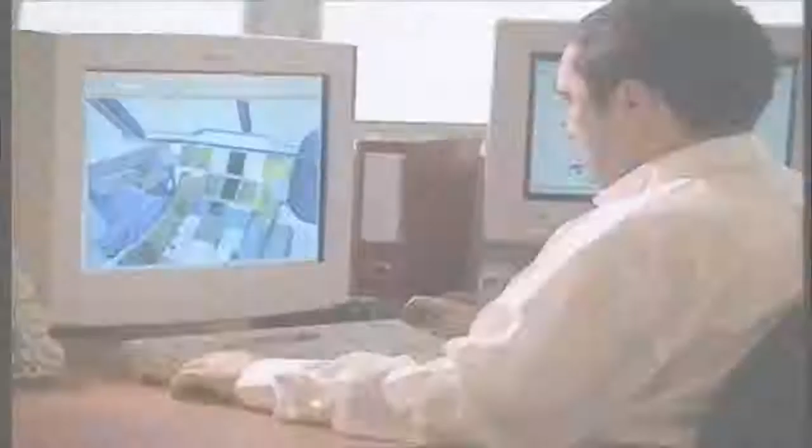It's a mega plane, bigger and heavier than any other passenger plane in the sky. It will hold more people than any commercial jet flying. Designers have spent billions. Now is the moment of truth. Will the world's biggest passenger airliner survive its maiden flight?

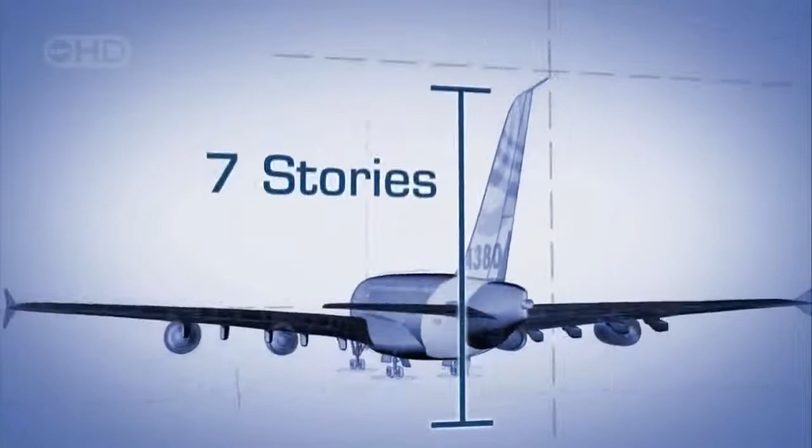An early spring morning, clear skies and a light breeze over southwestern France. Crowding the fields that flank Toulouse International Airport, 40,000 spectators, backpackers, campers and journalists from around the world, all vying for the perfect spot to watch the maiden flight of the Airbus A380, the largest passenger plane ever built. It's 73 meters long, 7 stories tall at the tail, almost 80 meters from wingtip to wingtip, heavier, longer and taller than a 747, with 2 full levels of seating, enough to hold over 550 passengers.

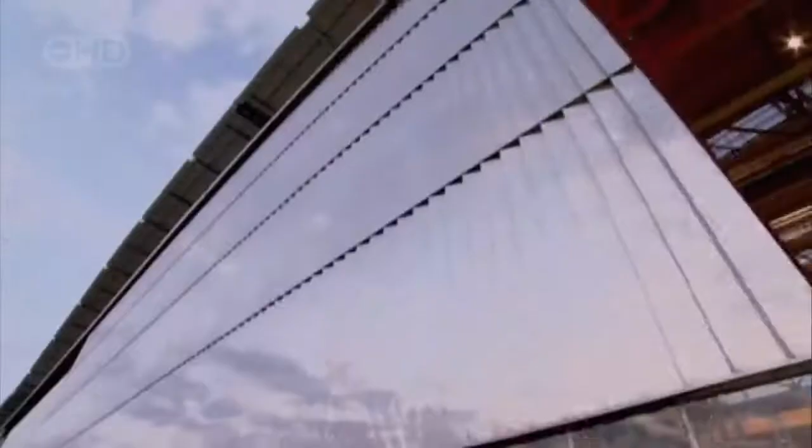Getting this monster off the drawing board required new, super lightweight materials, 4 powerful new mega-sized engines, massive new factories across Europe, and a computerized flight control system more sophisticated than any other in commercial aviation. This moment is the biggest gamble that the company has ever taken. A $12 billion investment, the company's entire future, and the lives of future passengers all ride on the success of this historic test flight.

Alongside the runway, a hush settles over the crowd as the megaplane comes into view. Gradually, it gathers speed, accelerating to reach its takeoff velocity of 269 kilometers per hour. Then, as it nears the end of the runway, the moment of truth. The massive nose tilts skyward. A sliver of daylight appears beneath the rear wheels, and the Airbus A380 takes to the sky for the very first time.

The engineers and technicians in the crowd breathe a collective sigh of relief. Their baby is flying.

The question now is, does anyone want a plane this big? Will the unprecedented size prove a boon or a boondoggle? Is this super jumbo the future of commercial aviation? Or the biggest white elephant since Howard Hughes built the Spruce Goose? It all depends on whether Airbus can convince airlines that travelers will want to trust their fates to this flying cruise ship.

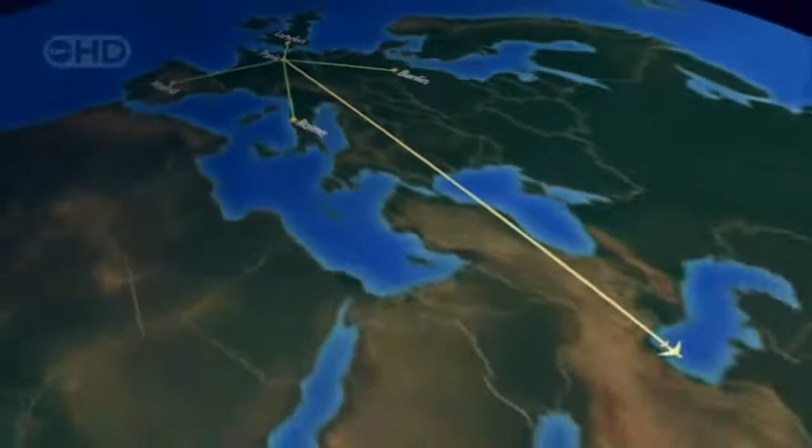The A380, though, is an altogether different order of beast. It's designed for hub-to-hub travel. Passengers will board a small plane near their home, then connect at a major airport to a larger plane, travel halfway around the world, and get off at their final destination. It's a strategy specifically designed to serve the most rapidly expanding long-haul routes in and out of Asia, and to cater to customers who appreciate a bit of pampering.

The plane's sheer size, with two passenger decks, is large enough for both standard seating as well as more luxurious features, like a lounge, a high-end shop, two staircases, even a waterfall. It's a breathtaking dream, but no one knew if such a plane could be built.

Some argued that such a craft would be far too heavy and expensive to be practical. But a tenacious and aptly named Airbus executive, Charles Champion, wouldn't take no for an answer. He encouraged his design team to think outside the box.

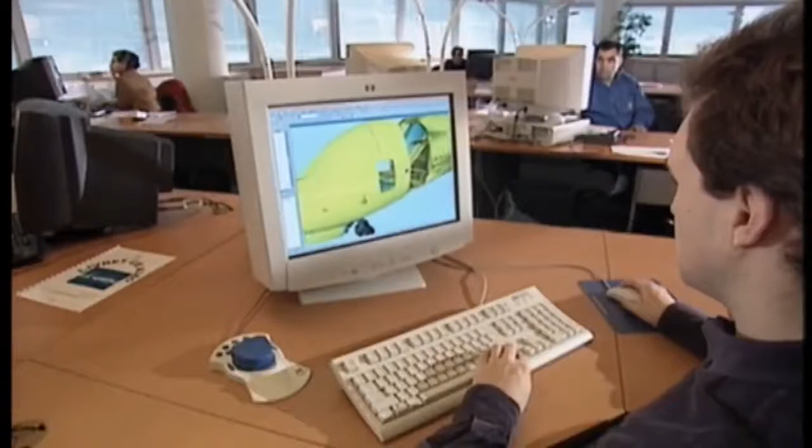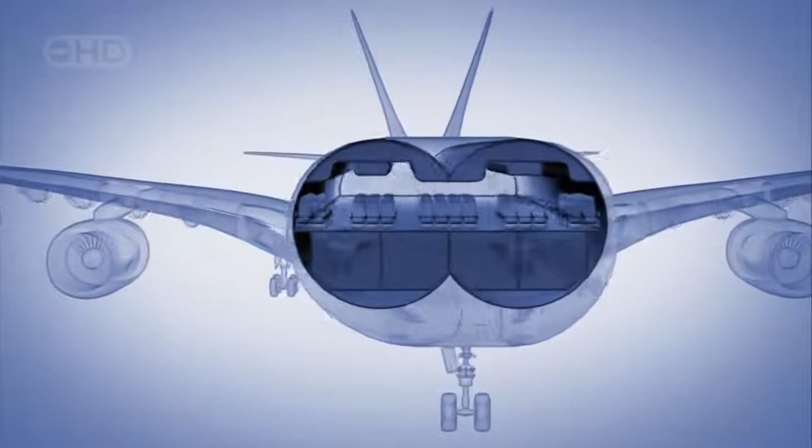Well, there were lots of weird designs. Some looked at the double bubble—one of their first ideas, a double-wide fuselage. It looked promising, but computer analysis showed that it would be far too heavy and not sufficiently aerodynamic.

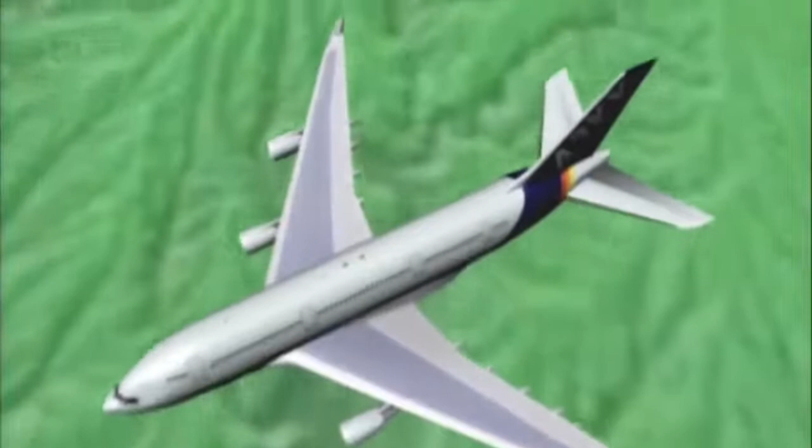So Champion sent his team back to the drawing board, and eventually they came up with this history-making concept: a full-length, double-decker passenger cabin, with a third deck below for cargo. Space-wise, it's the equivalent of two complete wide-body cabins, one on top of the other. The new plan called for an aircraft only 2.5 meters longer than Boeing's 747. It was 15 meters wider and 5 meters taller.

But when they ran the design figures through the computer, they had a shock. The plane was far too heavy. And we came up with horrid figures, saying, my God, this is the weight of the aircraft, it doesn't work.

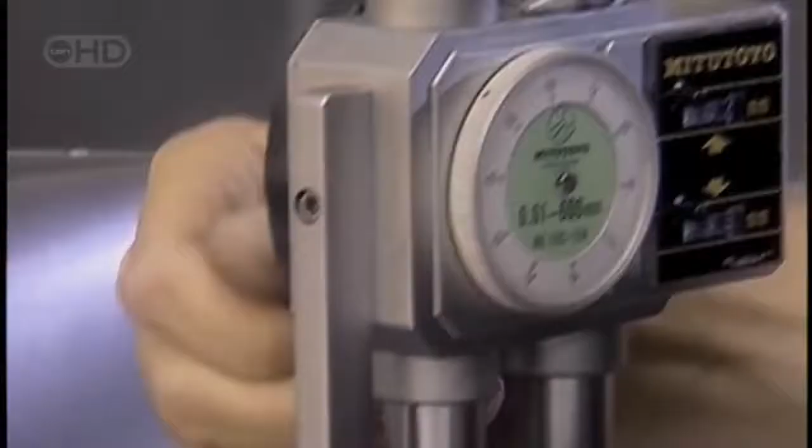So what we did immediately at the launch of the program, two to three months afterwards, we launched a very strong challenge on the weight. The team set out to bring the base weight of the aircraft below 277 tons—that's only about 50% heavier than the 747. An ambitious goal for a plane designed to carry over 100 more passengers and their luggage halfway around the world. Unless Champion and his engineers could find the means to beat that target, the dream would die.

Airbus engineers were faced with a design challenge that called for a lightweight plane carrying over 550 passengers at a lower cost per seat, not to mention quieter and less polluting than anything in the air. The design team knew they would have to rethink everything. They needed lighter materials, more powerful engines, larger wings, even bigger and smarter factories. Every component would have to be scaled up from supersize to mega size.

But even while the engineers were still scratching their heads over the details, the Airbus sales force was already hard at work, seducing customers with visions of the future. They created a full-sized interior mock-up that promised passengers in coach some relief from the grind of travel, with seats an inch wider than in other planes, and overhead bins 10% larger.

Each plane can also feature a new interior illumination scheme to eliminate the upsetting effect created when flight attendants suddenly switch on overhead lights. The kinder, gentler system in the A380 mimics the gradual transition from day to night and back to daytime again. These and other innovations make the plane distinctive, but it's the promise of opulent luxury that really turns heads. To help build excitement, computer programmers constructed a virtual showroom where airlines can bring to life their wildest design fantasies.

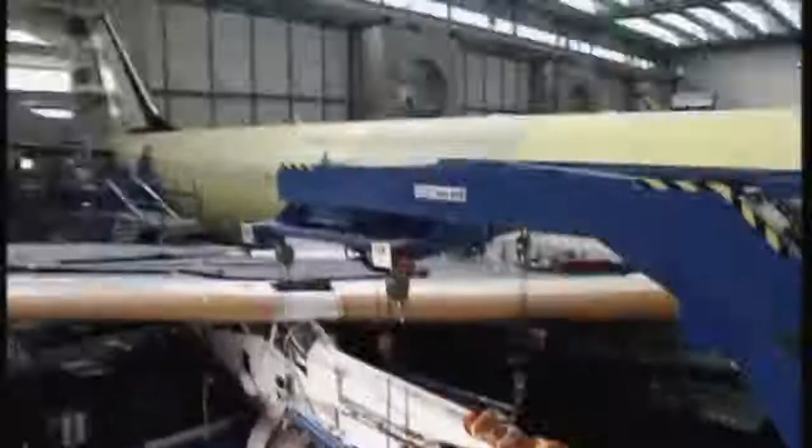Of course, no dream could take flight until engineers came up with a way to lift all that weight. In late 2000, builders finally settled on a design. For power, they would buy engines built by Rolls-Royce, capable of providing 30% more thrust than the engines used on the 747. Each massive power plant cost $15 million, as much as a ton of gold.

Altogether, they account for almost 25% of the cost of the entire plane. If there's one thing this aircraft needs, it's thrust that won't quit. Each engine provides up to 80,000 pounds of force. Running at top speed, this mega guzzler sucks down a litre of gasoline every second.

The A380 is designed for routine flights lasting 13 hours or more. That means when it's fully tanked for takeoff, the A380 carries a lot of fuel: 260,000 litres, 20% more than the load carried by the 747.

Just imagine what would happen if anything threatened the integrity of one of those fuel tanks, like a catastrophic engine failure that sends shards of metal tearing through them. That's the nightmare that haunts engineers at Rolls-Royce, and they're about to destroy an engine to make sure it never occurs.

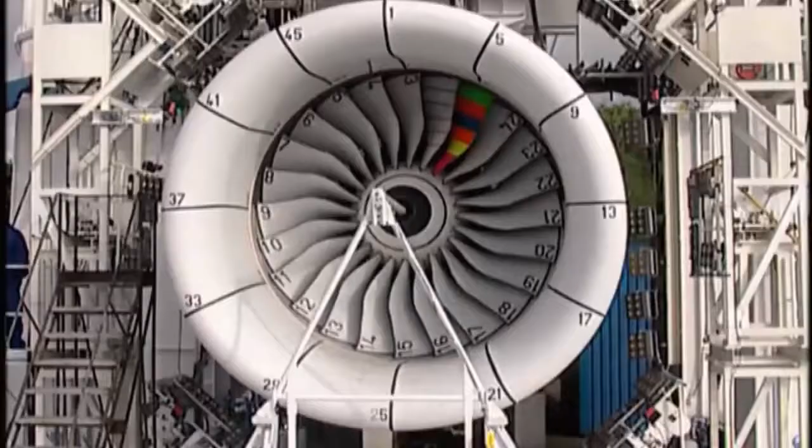These 24 titanium fan blades suck air into the maw of this A380 engine. Each blade is 1 meter in length and weighs 15 kilograms. Lightweight, but super strong.

When the engine is roaring along at full throttle, the blades spin at almost 3,000 revolutions per minute. The centrifugal force at the tip of each blade is equivalent to the weight of a 110-ton locomotive. If one of these were to break off and escape into the engine, it could wreak unimaginable destruction to the plane.

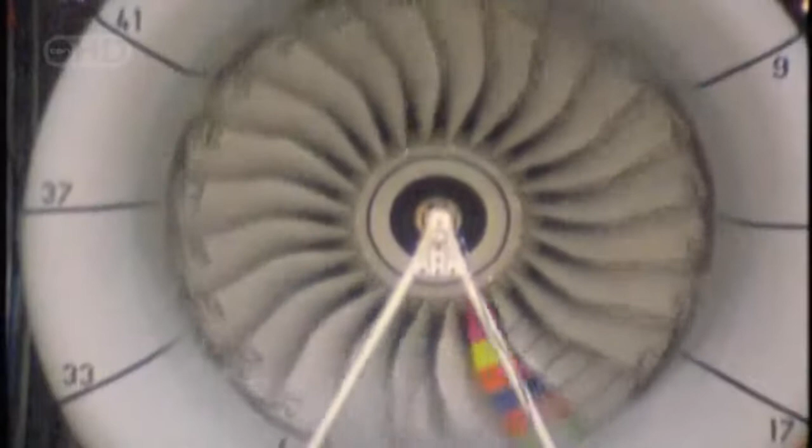That's why Rolls-Royce engineers are about to conduct an engine failure test. They're going to intentionally cause one of the fan blades to break off at full speed in order to prove that the engine enclosure can contain the damage without letting any metallic fragments escape. In the process, they will totally trash this $15 million engineering marvel, a small price to pay when the lives of over 550 people could be at stake.

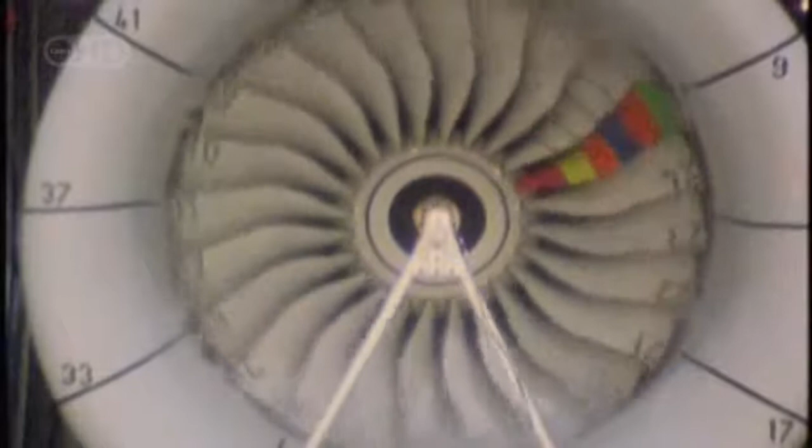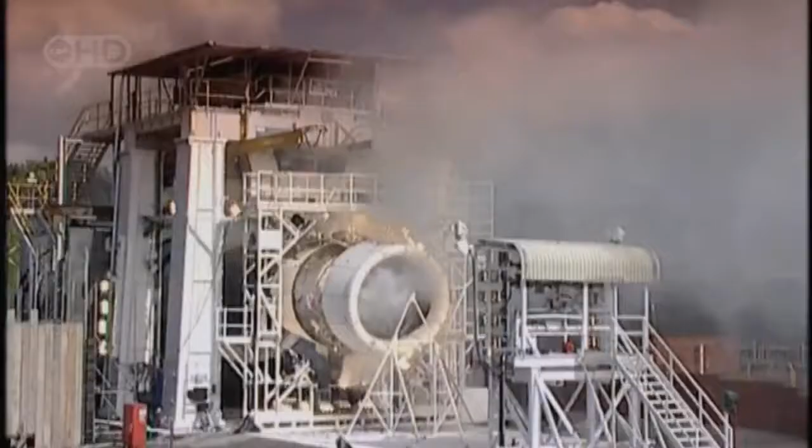A super slow-motion camera captures every moment in excruciating detail. The blades are striped to make visual measurement easier. When the fan is spinning at full speed, engineers send a signal to explosive bolts at the base of the multicolored test blade. Faster than even this camera can see, the knife-like piece of metal shears off and flies into the engine mechanism, wreaking havoc, but no fragments escape.

The A380 engines are safe for flight, but there are many more pieces to the puzzle. Every other major component would have to be designed from the ground up.

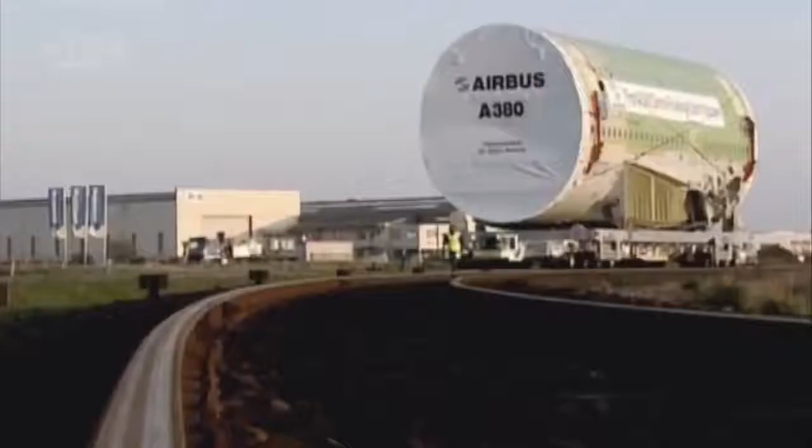Luckily, Airbus has already turned the world into a giant mega factory, with 1,500 suppliers and facilities used to build its existing planes, scattered over 30 countries, yet tightly linked by an advanced communication and transportation network.

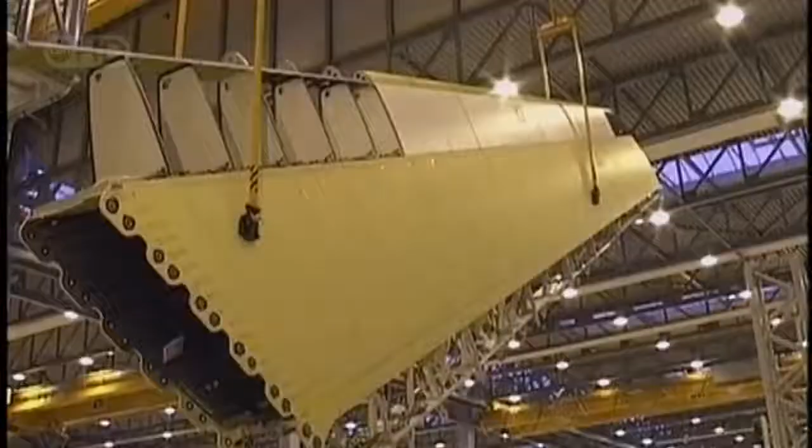To assemble the hundreds of A380s the company hopes to sell in the coming decades, planners settled on 5 countries to build the major components: wings in Wales, engines in England, the fuselage and vertical tail section in Germany, the horizontal tail section in Spain, and of course France, where all the pieces came together to assemble the finished plane.

The process begins in Wales, in 2 huge new wing factories, built to assemble the largest and most structurally complex commercial airplane wings ever designed, using 32,000 components shipped in from every continent except Antarctica.

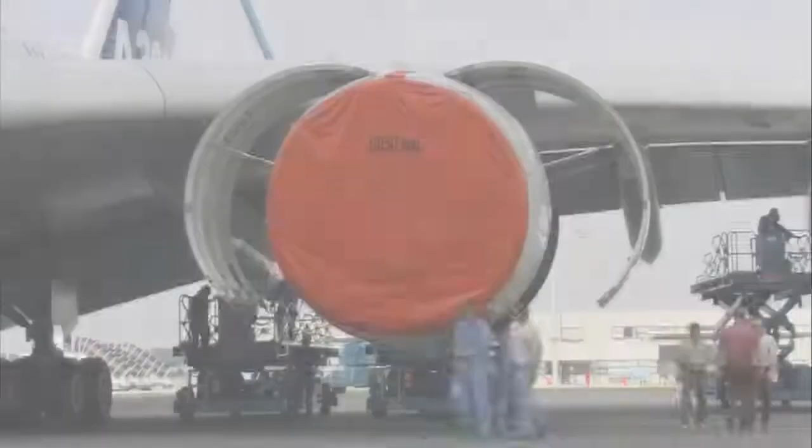The wings on the A380 are true mechanical marvels. They provide flight control and enough lift to carry the fuselage, plus the 4 supercharged engines, each weighing nearly 6.5 tons. And with 260,000 liters of fuel loaded inside 10 interior locations, the wings are also flying fuel tanks. They're one of the most critical structural components in the entire aircraft.

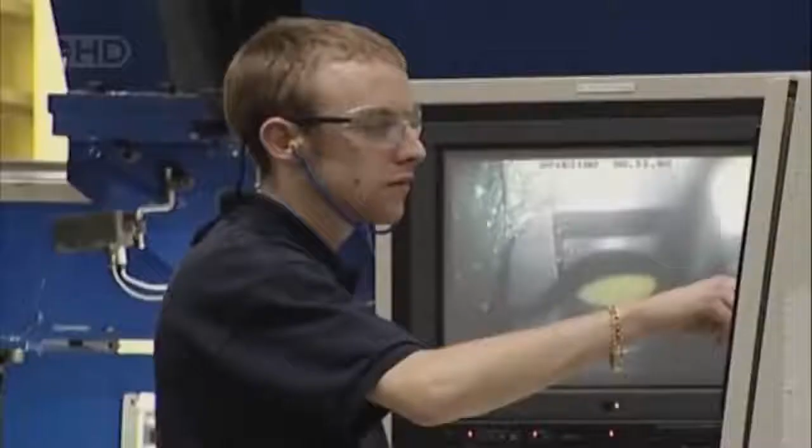The precision construction process begins with sheets of aluminium, destined to be shaped into the 10 panels that cover each wing. Each piece has its own shape and weight requirements. To whip one up, just follow 3 not-so-easy steps: shave it, wrap it, then bake it.

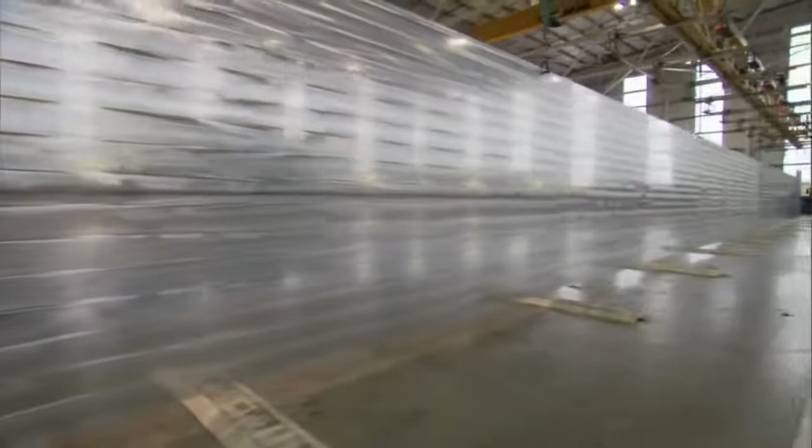This 34-meter-long slab of aluminium weighs in at 5 tons, way too heavy for the wing panel it's destined to become. In its final form, it will weigh close to 1 ton. So off it goes, to get the aerospace version of a tummy tuck. Overhead cranes use 32 powerful suction nozzles to lift and transport each aluminium slab.

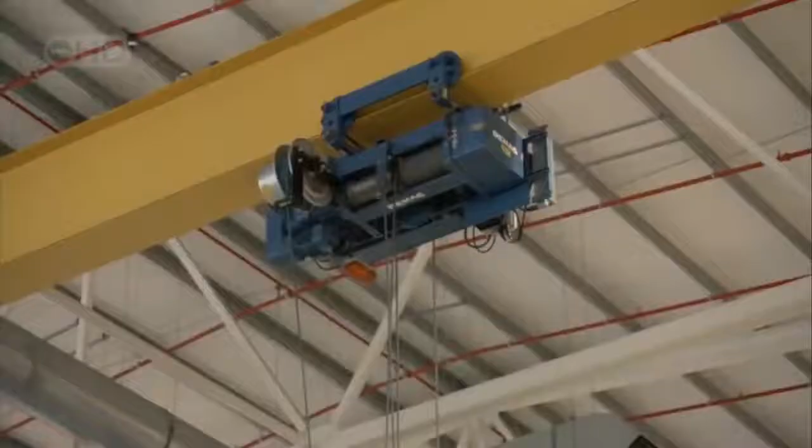Tim Fernifer carries the burden of responsibility. Using a remote-controlled steering device, Tim guides the 5-ton piece of metal across the factory floor, but he can't do it alone. His team must watch the motion of the wing panel throughout the ride.

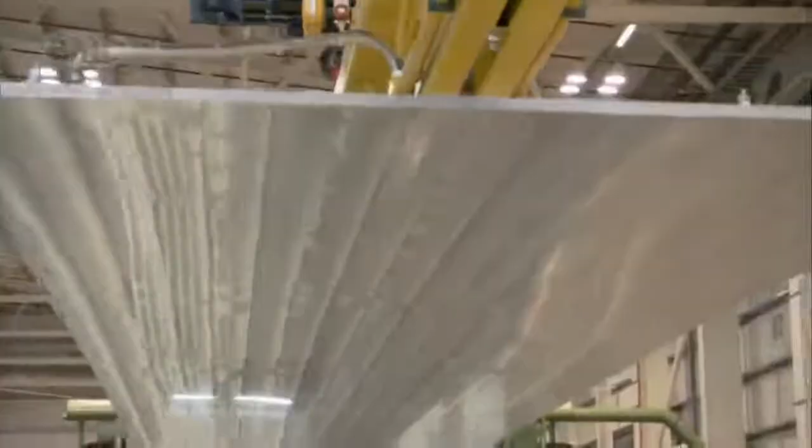You've got to be particularly careful when I'm handling it. I can't see down the other end, so I need another pair of eyes down there. It's just health and safety issues. You have to watch, make sure everybody's out of the way when it's actually moving. It's a dicey ride across the factory floor before the huge sheet can settle safely into position.

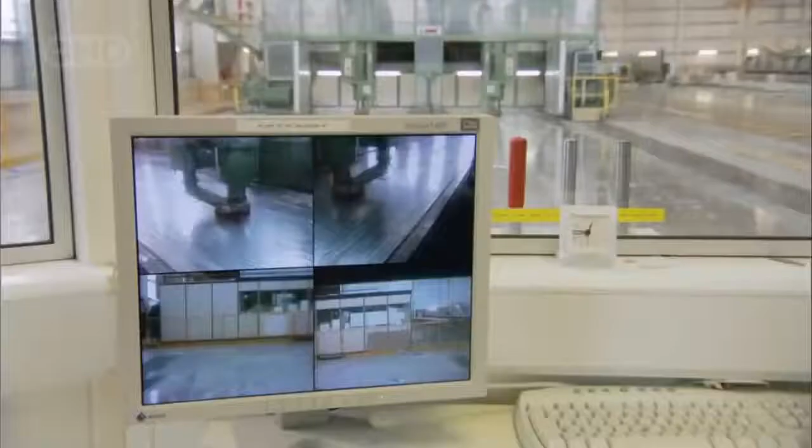A milling machine 40 meters long. Like an oversized cheese grater, the precision cutting head slowly cuts back and forth across the surface of the wing, painstakingly shaving the aluminium until the panel shape matches the 3D contour map stored in the machine's computer. The process takes up to 3 days. It eliminates 75% of the panel's weight while maintaining its strength.

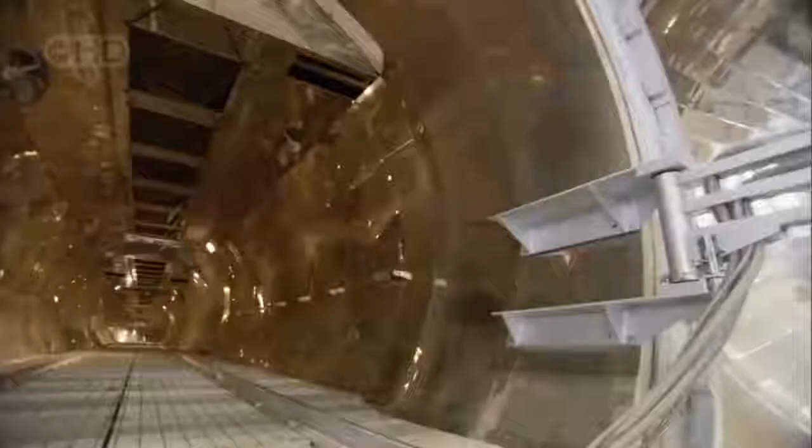Then it's ready for the oven, one of the world's largest pressurized heat chambers, 42 meters long, almost 6 meters wide. Technician John Massey has cooked plenty of wings for smaller Airbus planes, like the A320. It's a challenge to see it go from the size of the 320 to the size of the 380. It's a huge, huge jump.

The A380 wings are 50% larger than A320 wings. That means a 50% greater chance of error in this critical process. Baking requires careful setup.

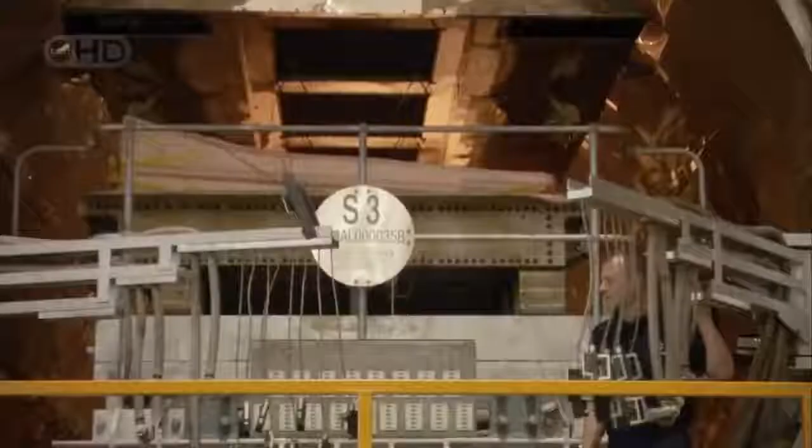First, Massey and others place the segment in a special metallic form. Then they vacuum seal the entire assembly with a massive piece of plastic shrink wrap to protect the metal from contamination. Inside, the heat must be uniform across the entire panel, 150 degrees centigrade, with no room for error.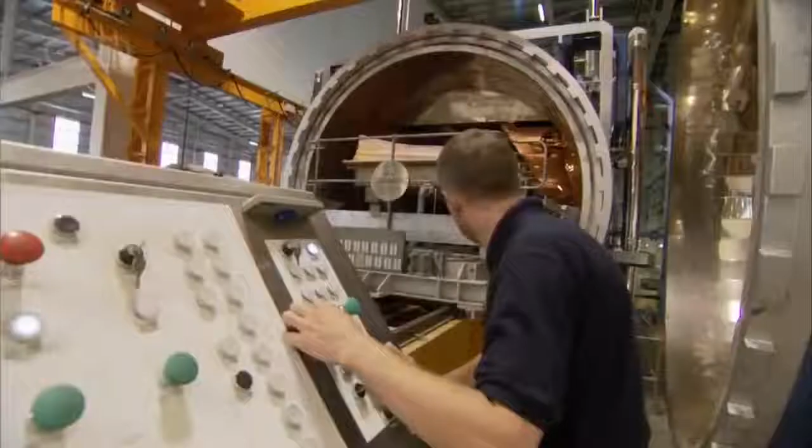We try to avoid any changes in the vacuum or the temperature, so the temperature must remain constant right throughout the process. It must maintain within 3 degrees. Otherwise the run is invalidated. After 24 hours, the panel is ready.

Specially equipped vehicles rise up and move into place in front of the oven. All eyes are on the plastic protecting the wing panel. If it breaks, the aluminium wing piece is compromised. A disaster. The entire wing panel would be worthless.

If the bag bursts, it means starting the job again from scratch. Anxiously, they scan the surface for any breach. At last, the wing is cool enough to touch. And good news, the bag appears to be intact.

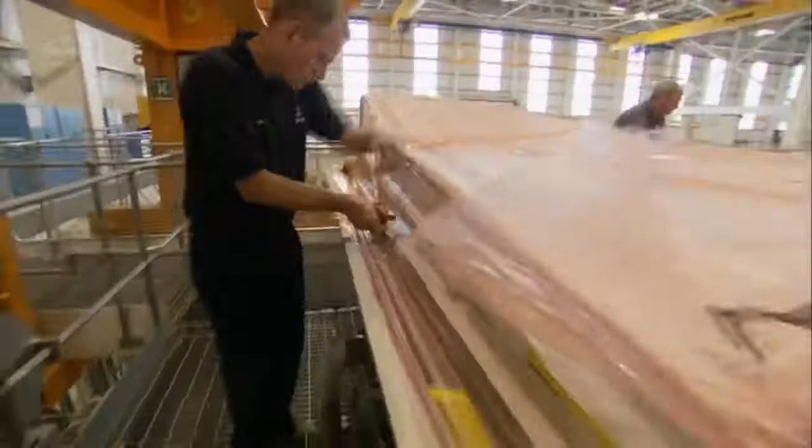Finally, the wing segment arrives in its docking bay. Here, the technicians first remove the plastic and cloth wrap. Now begins the tedious search for flaws.

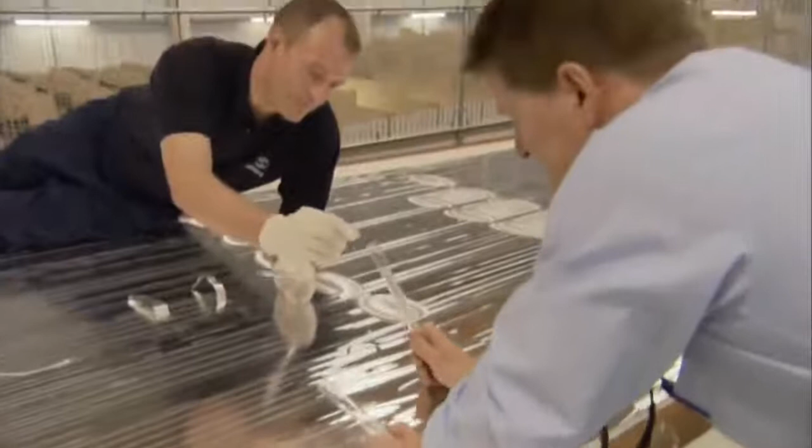John's boss, Gareth Williams, arrives to inspect the piece. He retrieves small metal rods that were baked onto the top of the wing panel. Each of these cylinders tells an important story about future safety. These are test pieces which are made of the same material as the wing panel, and we use them to confirm that the heat process this part's just gone through is correct and to the right specification.

When this testing phase is complete, Gareth and John get the okay to move the wing to its next destination.

The nearby wing assembly plant, an enormous brand new factory located just up the road. It's one of Britain's largest industrial buildings built in this century. It's nearly 85,000 square meters in area, equal to 12 full-size football pitches. This is where the builders attach the aluminium skin panels to the wing skeleton.

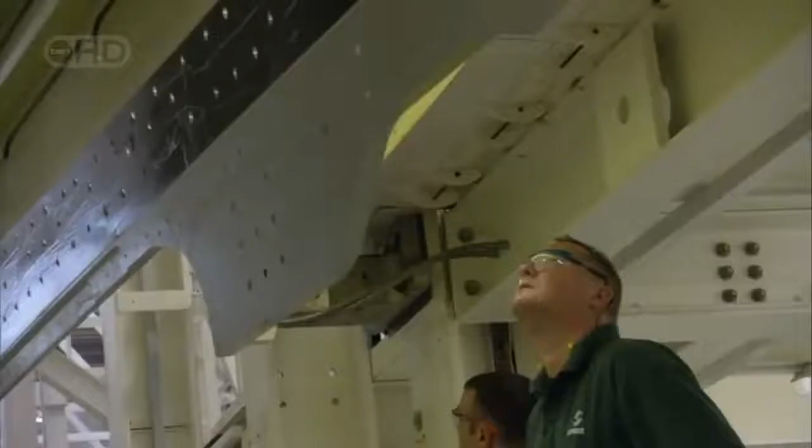George Lee guides his team through the tricky assembly process. Today they're preparing to lift and place one of the largest of the 20 aluminium panels, 34 meters long and weighing in at more than 1 ton.

Size is a great challenge because everything requires some form of overhead lifting. Nothing can be lifted manually, so virtually everything requires overhead craneage movement, and therefore the management of the craneage system is very, very important. The panel hangs like a huge guillotine, suspended over the factory floor.

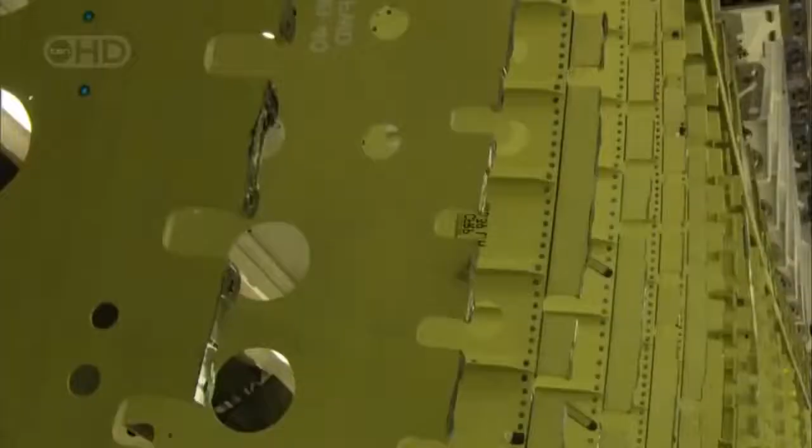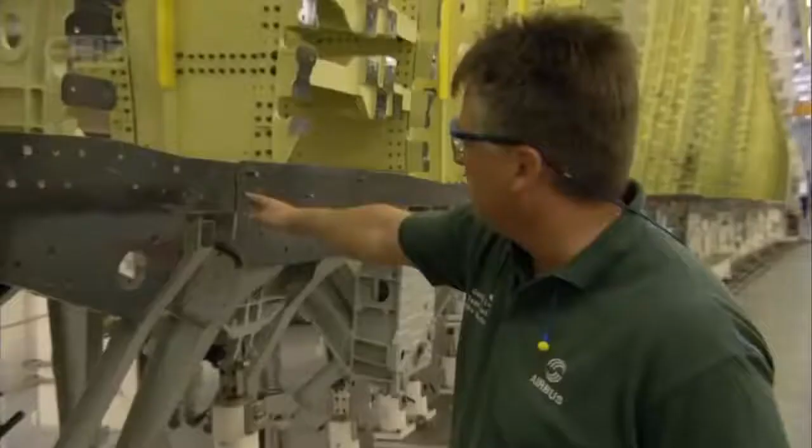But that's not all that's hanging over the assembly team's head. Time is running out. Along the edges of the partially constructed wing, builders have applied a sealant that'll help ensure the integrity of the fuel tanks. The sealant dries quickly within hours. The team must fit the wing panel into place before the sealant dries, or the wing could be defective.

This time they're cutting it close. The only concern I've got is the time factor. If they don't succeed, the team will have to scour the sealant off the aluminium surface and start the whole process again.

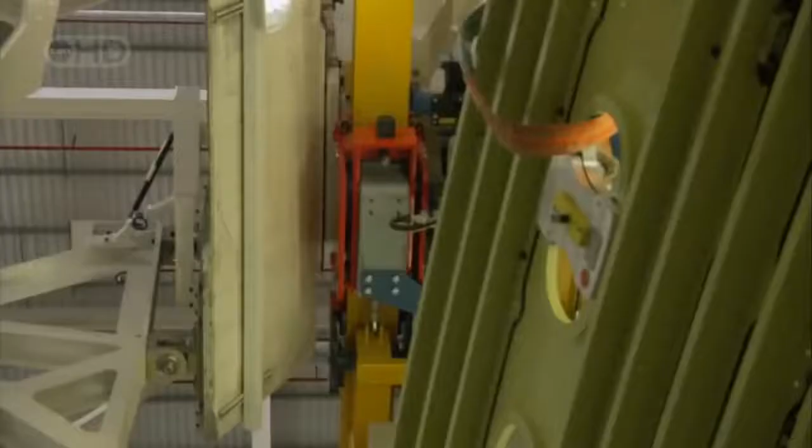Finally, the panel settles into place. 1 down, 9 to go.

It can be stressful, yeah, it can be stressful. At certain times, it's an enjoyable job, because when it actually all works and goes together, it's quite enjoyable. You've made it an achievement.

Now it's time to glue and bolt together the pieces, like building the world's biggest model airplane wing.

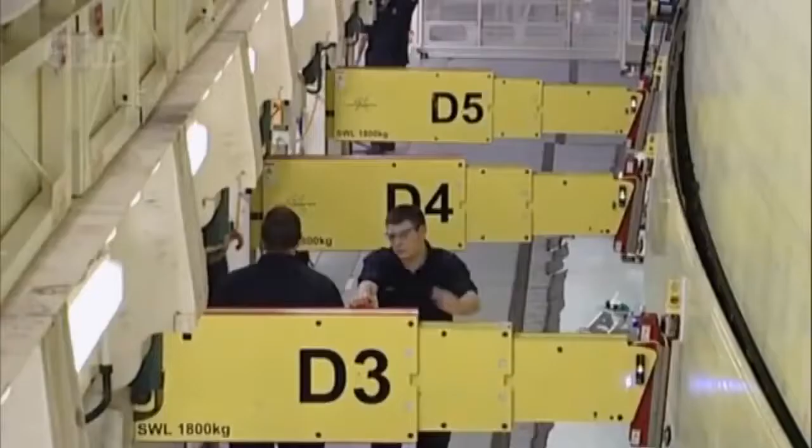This part of the process remains a carefully guarded trade secret. The company wants our cameras off. No cameras.

The secret assembly process inside the jig will take nearly 4 weeks to complete, but it takes more than a wing to make a plane.

All across Europe, more factories are coming online, pumping out body parts of this giant Franken plane. But not everyone is happy to see this kind of progress. Some locals in Germany are up in arms over Airbus's ambitious plans.

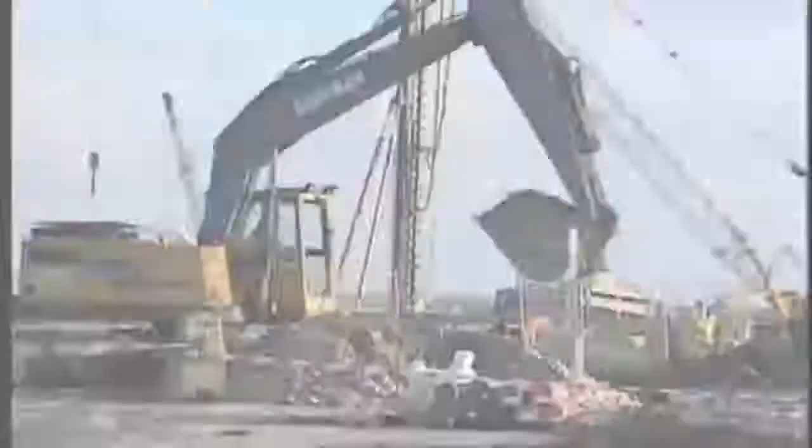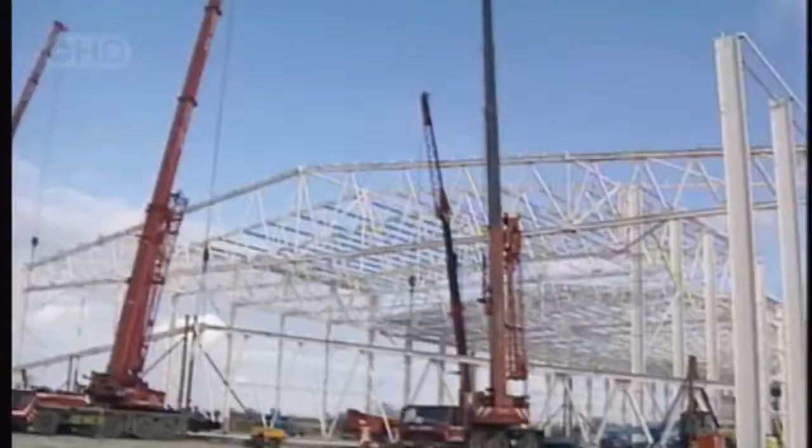This is the newest Airbus factory in Hamburg, a megastructure big enough to house 4 A380s side by side. Airbus has been building airplane fuselages in Germany for more than 30 years. But with the announcement of the A380, the company needed to massively expand the site and send finished planes here to get tricked out on the inside and painted on the outside.

No matter what the customer wants their plane to be, a 550-seat cattle car, a high-class hotel in the sky, or even a heavy-duty freighter, this is where the seats, the carpets, the stairs, and yes, even the bar and the waterfall will all be installed.

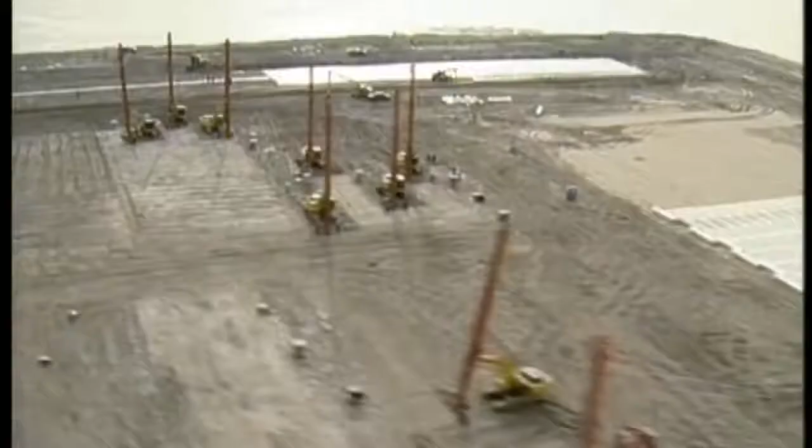The expansion plan called for 3 new buildings and a longer runway to accommodate the massive plane, but there was a problem. Airbus's main factory here sits alongside Germany's Elbe River, smack in the middle of Europe's largest tidal wetlands.

It's a very special area because we have there the influence of water from the country and tidal water from the sea. So we have a mixture of sweet water and salt water. This fragile ecosystem is home to 70 species of migratory birds. Now 71 if you count the Airbus A380.

Airbus wanted to fill in 140 hectares of pristine wetland, and local activists cried foul. A pitched battle in the courts and demonstrations in the streets delayed construction of the factories for over 2 years. But eventually, local and national politicians who wanted to bring business to the community intervened.

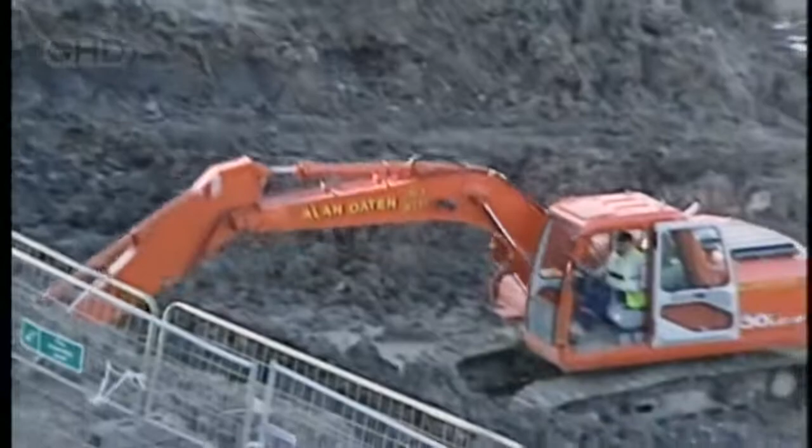The factories went up. One got busy building fuselage segments, but the other 2 stand nearly empty. More lawsuits still block the Hamburg facility from taking delivery of all of the planes it's meant to finish. Unless the company wins in court, it may have spent a few $100 million building a factory of little use.

The problem lies with the runway. Airbus needs a longer runway to accommodate a heavy-duty cargo version of the A380. We need the runway extension in Hamburg for the pilot to test the performance of the aircraft. And he only can test this when he has an aircraft with a weight which is approximately the weight you normally have in cruise altitude and a normal scheduled flight.

That plan to lengthen Hamburg's existing runway has met with considerable resistance from locals. Their concern: extending the runway will bring the tarmac to within just 450 meters of village orchards, and uncomfortably close to a Lutheran church that houses a priceless organ built in 1688.

A delicate instrument that could be damaged by ground vibrations and wake vortices, turbulent bands of air similar to miniature tornadoes. We have very precise information on the generation of these wake vortices, small tornadoes, wind generated by every aircraft, which can affect buildings and also persons close to the runway or close to the flight path. And we have predictions that we should expect occasionally winds up to Beaufort 12, which is about 130 kilometers per hour in the core, and these tornadoes will hit the church tower and the roof construction.

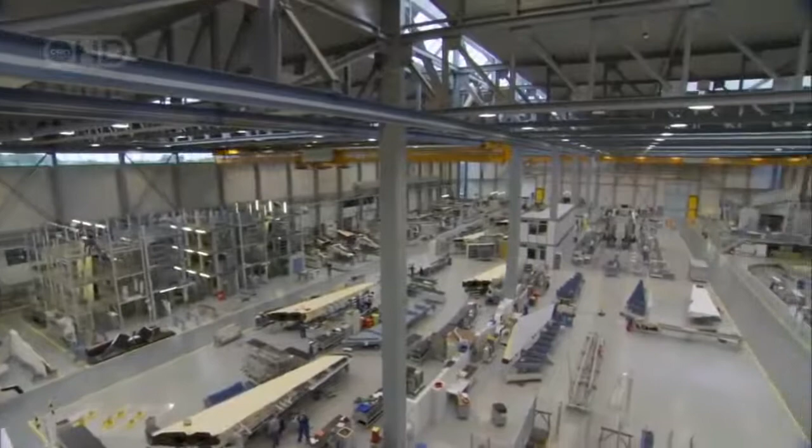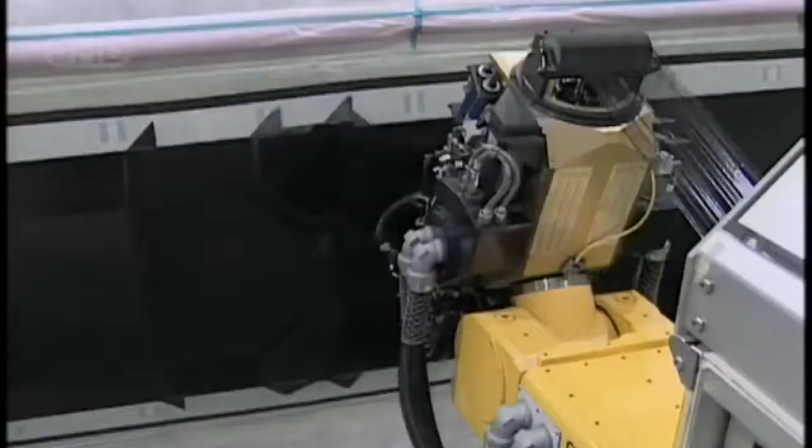But just 57 kilometers away in the town of Stade, another big gamble is underway. The company is using a futuristic material to build the largest commercial aviation tail fin in the world. It's called carbon fiber reinforced plastic, made out of the same stuff that gives diamonds their incredible strength. Carbon fiber is 6 times stiffer than steel and much lighter. It's the only option if builders are going to keep the weight of the plane below the target of 277 tons.

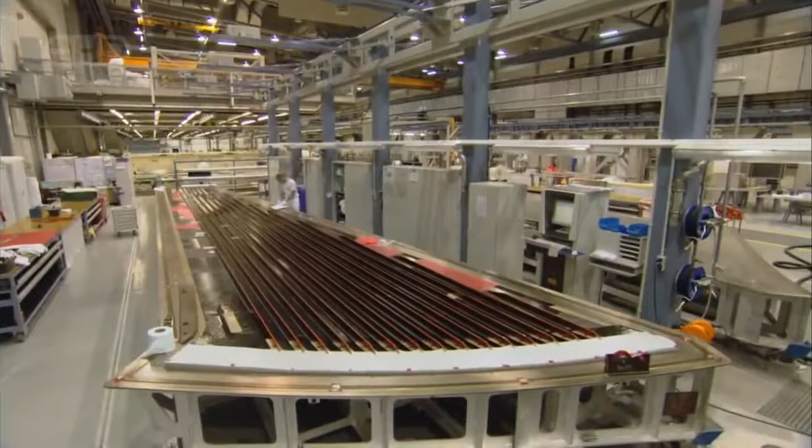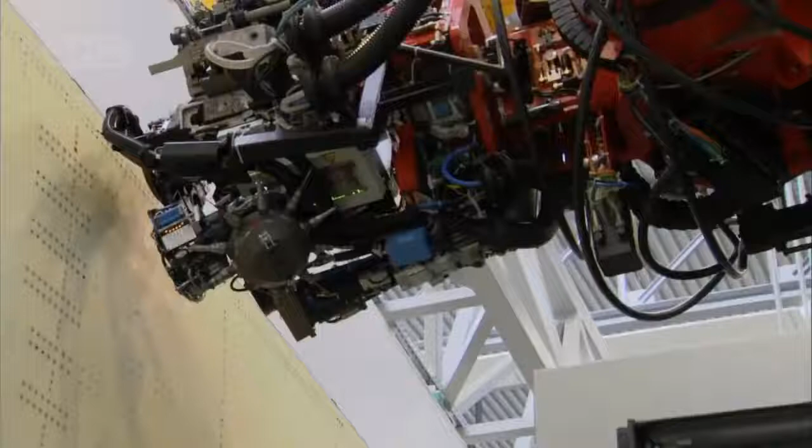Unlike forged metal, carbon-reinforced plastic parts are actually woven, like cloth. Fabricating machines spin out tail panels by combining super-strong carbon fibers with plastic resin to create almost any shape designers can imagine. After baking, strengthening, painting and drying, technicians join the lightweight panels to the tail skeleton with the help of this computer-controlled riveting robot. Working around the clock for a week, the robot makes 10,000 critical connections with tolerances no human can match. The integrity of the tail fin is crucial to the safety of passengers.

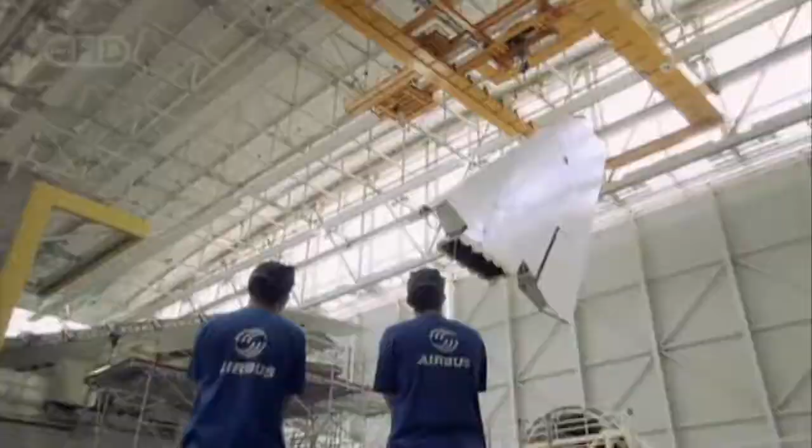It was the second deadliest crash in US history, and investigators made a disturbing discovery. It had been caused when the tail fin and rudder, made partly out of composite materials, sheared off as the plane accelerated. Investigators concluded that cockpit errors, not a failure of the carbon composite material, most likely caused the crash. Builders have applied the lessons of that catastrophe to the tail fin of the A380.

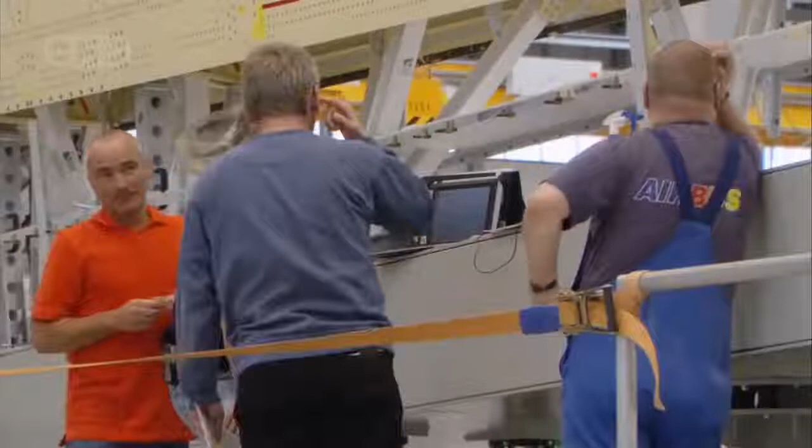But today, something's gone wrong on the factory floor. A lightning strike zapped the power supply, and now the precision riveting robot is dead in the water. We had a storm, a lightning strike. The PC failed and the hard disk was completely gone. Mother Nature has thrown a wrench into the works, causing a total crash of the system. It is electricity. Sometimes it happens. Normally we are protected, but it can just happen.

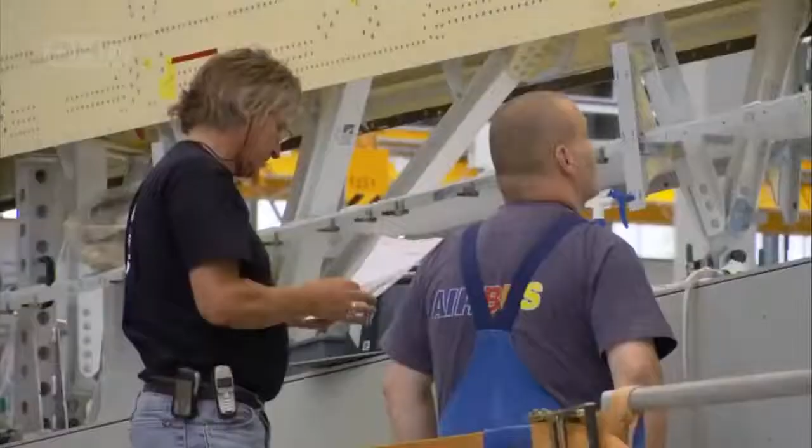Critical hours pass as Kai Baumgartner and his colleagues struggle to get the robot back online. If they can't fix the computer, they can't make the deadline set for finishing this tail fin. Kai and his team must find the problem, and quickly. By the end of the shift, the sound of riveting echoes through the factory once again.

Kai is finally back at work, personally verifying that every one of the 10,000 connections is perfect. A tiny camera positioned on the end of the riveting machine allows Kai to carefully examine each rivet, making sure to catch any abnormalities in the process.

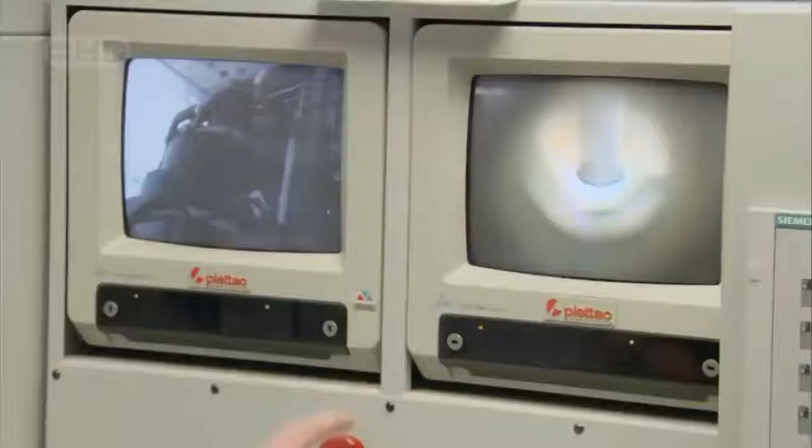I make sure that the drill doesn't get stuck or any mistakes happen. I have my different systems here. It can happen that something is stuck or that an error occurs. It's a repetitive process, but Kai must remain vigilant to safeguard the lives of future passengers.

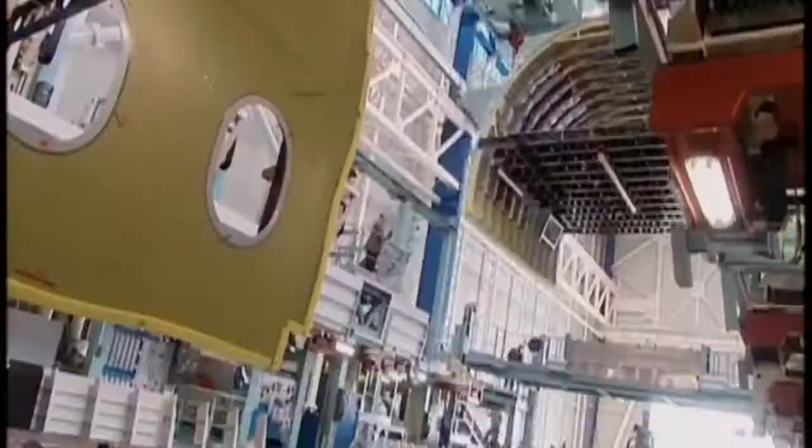Around the world, manufacturers and suppliers are putting the finishing touches on the components of the A380. But putting all the pieces together will be a logistical nightmare. Airbus's existing transport system, the custom-built mega freighter called the Beluga, is too small to haul the A380 components to the assembly factory in Toulouse, France. So builders came up with a risky plan to haul millions of dollars of critical components by water and land.

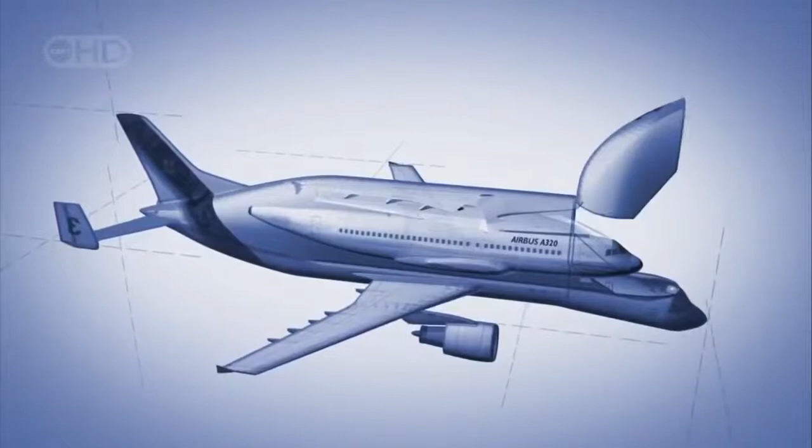Airbus had a problem. They needed to move pieces for the largest passenger plane in the world from factories all over Europe to their final assembly plant in Toulouse, France. For smaller planes, they could use the Beluga, Airbus's distinctive custom-built transport plane. The Beluga's cargo hold measures 7 meters high, 7 meters wide, and 38 meters long, big enough to swallow the fuselage, wings, and tail sections of Airbus passenger planes like the 150-seat A320.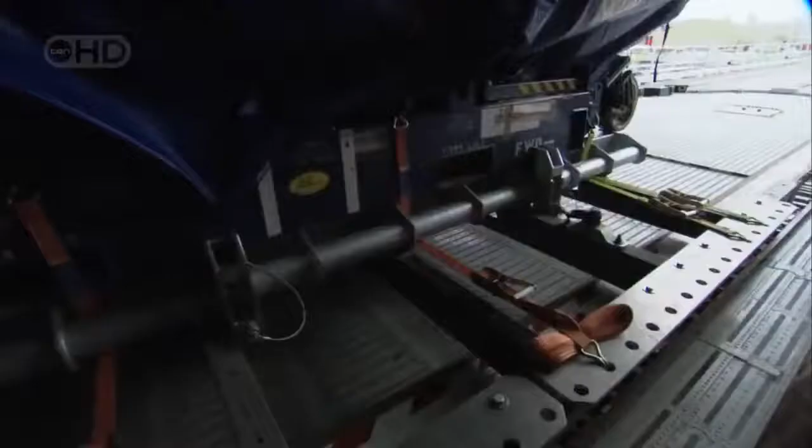But when Airbus decided to build the massive A380, the sheer size of the parts overwhelmed even the Beluga. The Beluga is far too small to carry the A380's enormous double-decker fuselage or its record-breaking wings. So to get their parts to the assembly plants, the company now had to move them by sea and over land, instead of a 2-hour ride in the belly of the Beluga.

Parts for the A380 joined a days-long parade of specially outfitted ocean ships, river barges, and trucks. Keeping this massive system on schedule is the job of Surface Transport Coordinator Philippe Nedelec, who has to keep it all moving fast. I like to say that I am a kind of conductor. I have to impose the tempo to everybody.

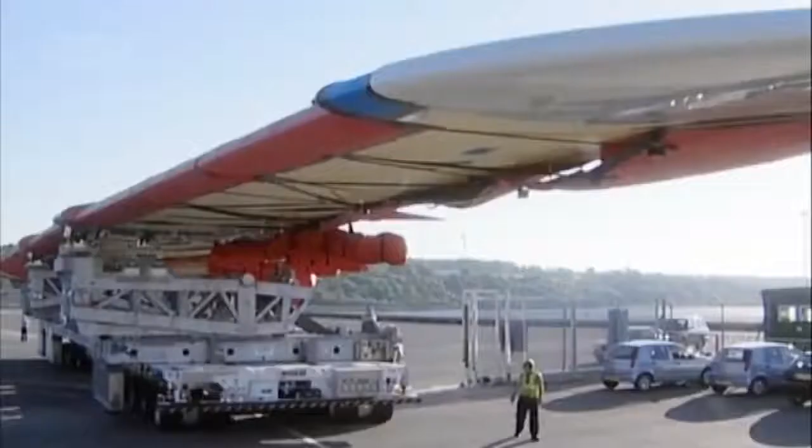Wings and fuselage arrive by sea in the port city of Pauillac in Bordeaux. From there, it's 96 kilometers by barge down the Garonne River. It's a tricky bit of navigation to clear the historic Pont de Pierre Bridge, a prized landmark built by Napoleon almost 200 years ago. We have to cross a very old bridge. And at the beginning, the Bordeaux people were very afraid of what these Airbus people were going to do with our nice bridge.

To maneuver beneath the Pont de Pierre, Philippe and his team keep careful track of the tides and the weather. If they don't time their trip just right, if the water is too high or the currents too strong, they could collide with the bridge, destroying precious cargo and damaging a priceless piece of history as well.

But waiting for the perfect moment isn't always an option. Suppose we miss a call for weather condition or some other things, then the boat can miss a tide, so we can miss 6 hours. And this 6 hours you can miss 1 week because we cannot start the road convoy every day. It's not so easy. We cannot start when you want.

Every pass under the bridge is a potential disaster. This time, they make it through, but just barely.

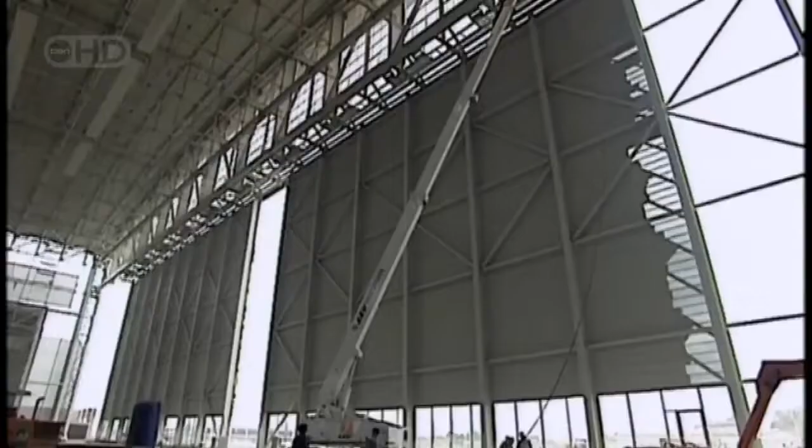At last, the convoy arrives at its destination, the final assembly line, the nerve center of the entire operation. The final assembly line sits on the edge of Toulouse's Blagnac Airport. As with all A380 factories, this one is huge: 500 meters long by 250 meters wide and 15 stories tall, using 32,000 tons of steel, enough to build 3 Eiffel Towers.

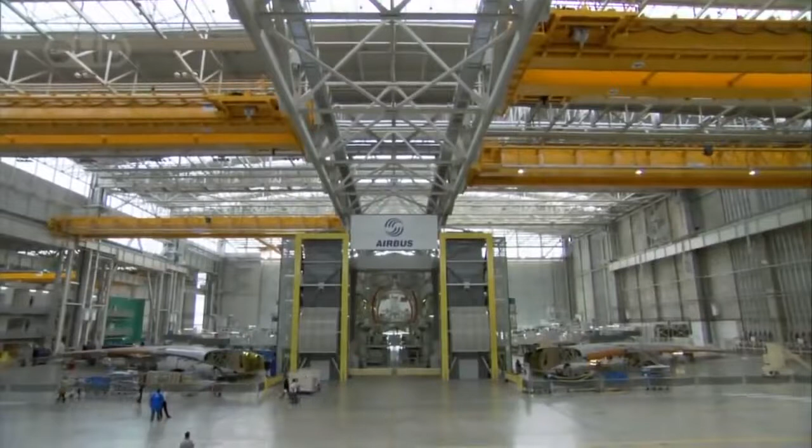It's in here that the massive plane finally begins to take shape, with the help of a gargantuan assembly structure known as a jig. According to Julien Pouillou, there's nothing else like it in the world. We're standing in front of the biggest jig that is used in the world to assemble an aircraft. This is the Station 40.

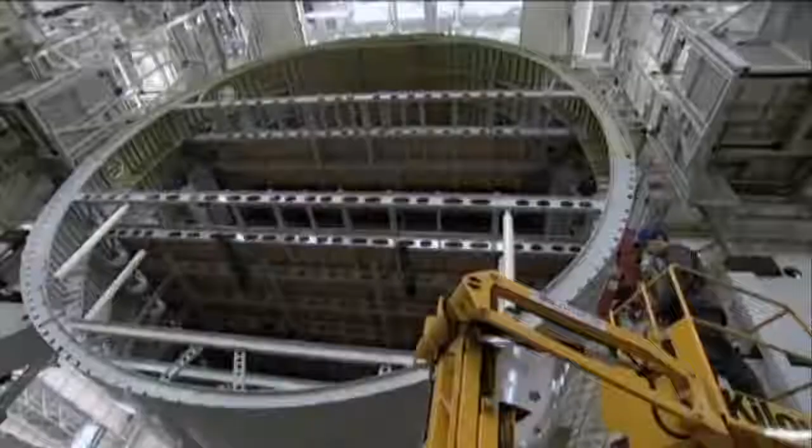Station 40 is where the fuselage, wings and tail all come together. The one-of-a-kind jig stands 5 stories tall, weighs 1,200 tons, and comes equipped with 4 elevators to carry workers to their stations. This is where theory becomes reality, as pieces made all over the world finally come together. If there's been any error, if the pieces don't measure up to spec, or if the joints don't come together just right, within millimeters, the huge passenger craft won't be fit for flying.

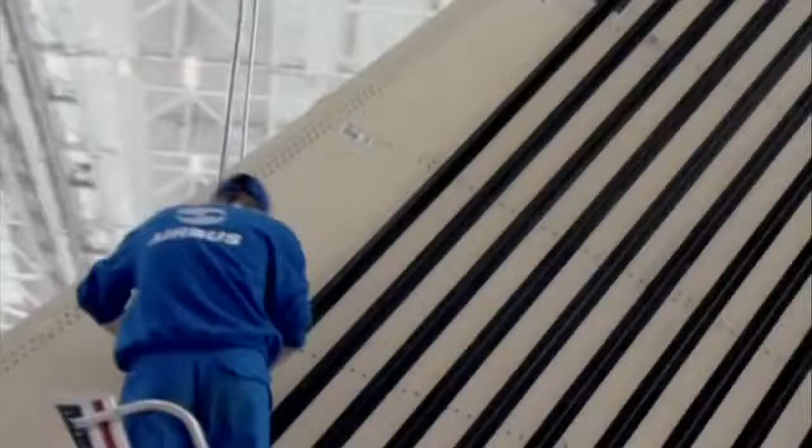The lives of future passengers depend on the steady hands of these craftspeople and engineers, working inside the mighty Station 40. The challenge is for us to assemble those pieces together at the same time, because we have a lot of workers working in the same area at the same time, and they have to do all sorts of completely different tasks. One has to take care of the wings and one has to take care of the fuselage, and so they are not doing the same job, but they have to do it together.

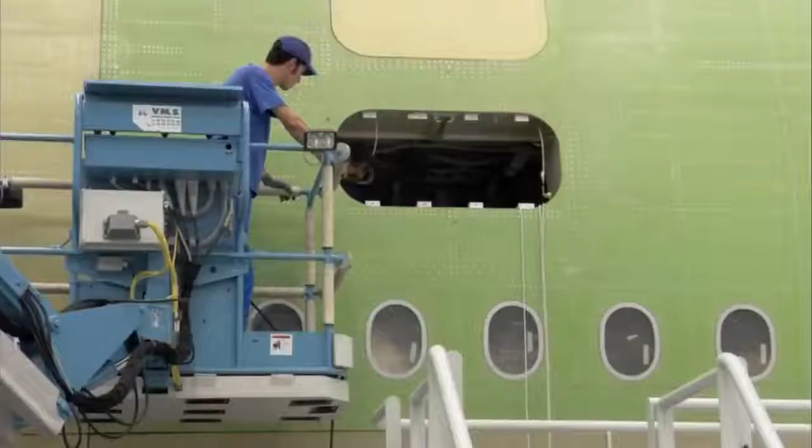Work on this plane now proceeds at an intense pace. It'll take 4 weeks to complete the assembly. Once the plane has been released from Station 40, it moves through a pair of 100-meter wide sliding doors and makes its way to the systems hall. Inside this gigantic space, 3 A380s can sit side by side comfortably, while technicians swarm over the superstructure, testing the electrical, hydraulic and plumbing systems that'll bring the dormant aircraft to life.

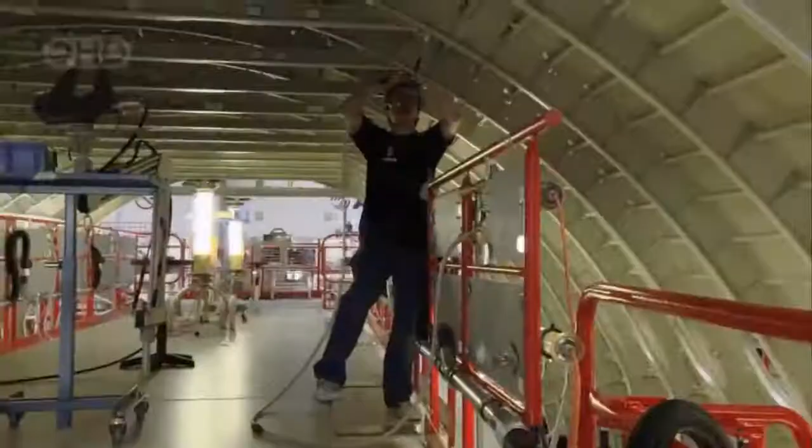Building just one A380 is a massive job, but for Airbus to survive, they're going to have to speed up production to a breakneck pace. Eventually, the Station 40 team will have to crank out a defect-free plane every week.

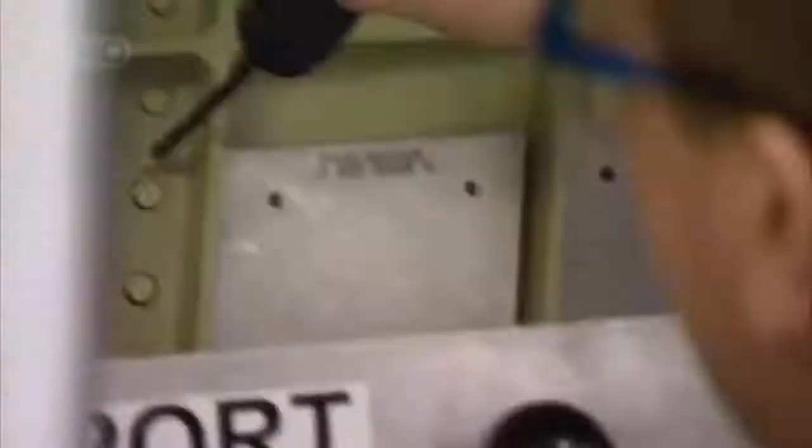But before that can happen, the plane must be proven airworthy. Now all eyes are on the skies over southern France, as the gathered crowd wonders, will the A380 survive its maiden flight?

At Blagnac Airport in Toulouse, 40,000 people anxiously scan the skies, searching for some sign of the A380. All flights in and out of the airport are put on hold. The skies over Toulouse are eerily quiet.

Nearly 4 hours have passed since takeoff. If all goes as planned, the huge airliner should swing into view at any moment. But if there's a problem, the flight crew will quickly discover how well their training has prepared them for disaster.

Much of that training took place using powerful computers, programmed to mimic the behavior of the A380. In a simulator like this one, with a computational engine 500 times more powerful than a home video game console, photorealistic visuals help pilots to get a feel for the plane. Despite the A380's unprecedented size, Airbus engineers have tried to make it fly like any other airliner.

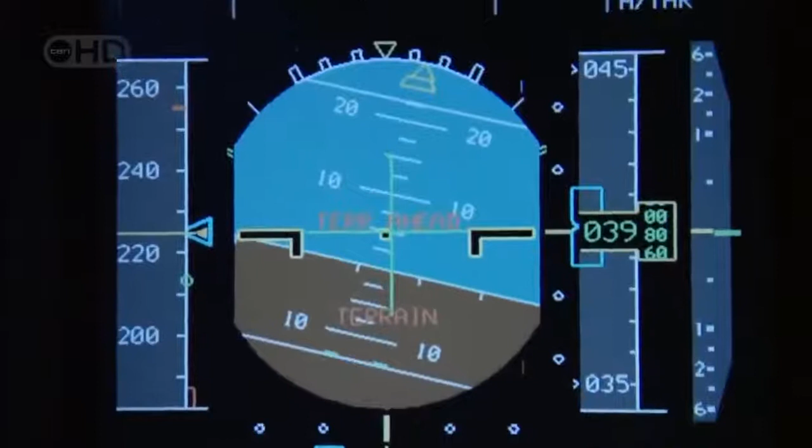It would take a lot more than an engine failure to knock this monster out of the sky. But test engineers are nothing if not imaginative, and they've loaded their simulators with more than 400 different catastrophe scenarios, everything from a fire in the cargo hold to a devastating lightning strike.

The exercises are useful, but no computer can simulate the awesome responsibility of shepherding 550 passengers through the stratosphere. The challenge is to fly with many passengers. I think this is the greatest challenge, yes.

Outside, all eyes are on the sky. The wait is excruciating. Then, a glint of reflected light. At last, the mega-plane sails into view.

Eager reporters and photographers race to the edge of the tarmac to record this historic moment. A showy flyby excites the crowd. Makes a steep turn, lines up with the runway, begins final descent.

Then, at long last, touchdown.

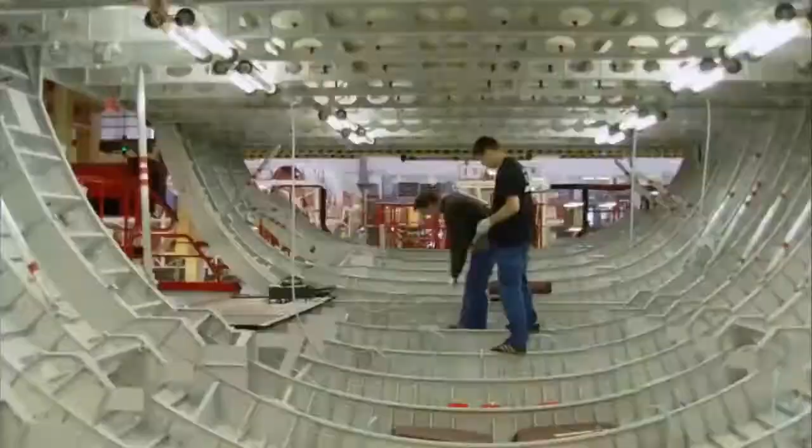At the time of the test flight, Airbus had 154 orders and still needed 96 more just to break even. To fill those orders, they must dramatically increase the speed of production and convince the world's airlines to pay nearly $300 million for each plane.

But even while potential customers were lining up to drool over decor, and the engineering team was still basking in the afterglow of the successful first flight, Airbus surprised the industry when it unexpectedly announced a 6-month delay in the delivery of the first aircraft.

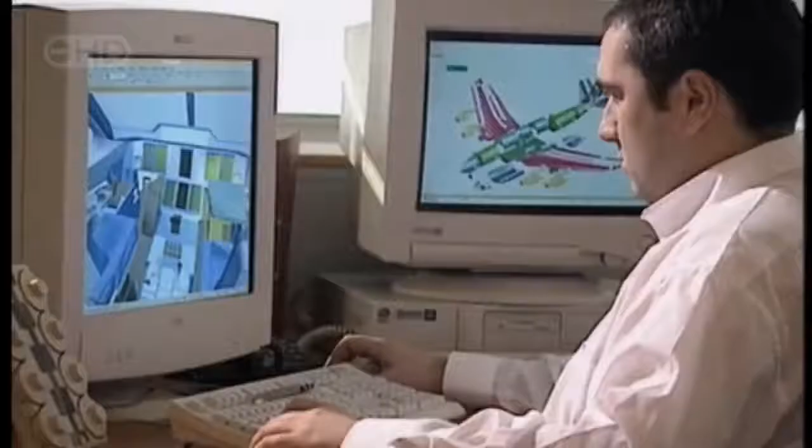Early customers who took the risk and put down deposits before the first plane had ever been built are not happy. Some analysts believe the plane is still heavier than Airbus promised, but Airbus insists that the delay is merely routine. The real achievement will be when the customer says, 'Great, this is what I expected, I love it, give me more.'

If the last 40 years in the history of aviation is any guide, and more people fly further and more often, year after year, then Charles Champion's daring bet may well pay off, and the A380 just might become the flagship of commercial aviation well into the 21st century.